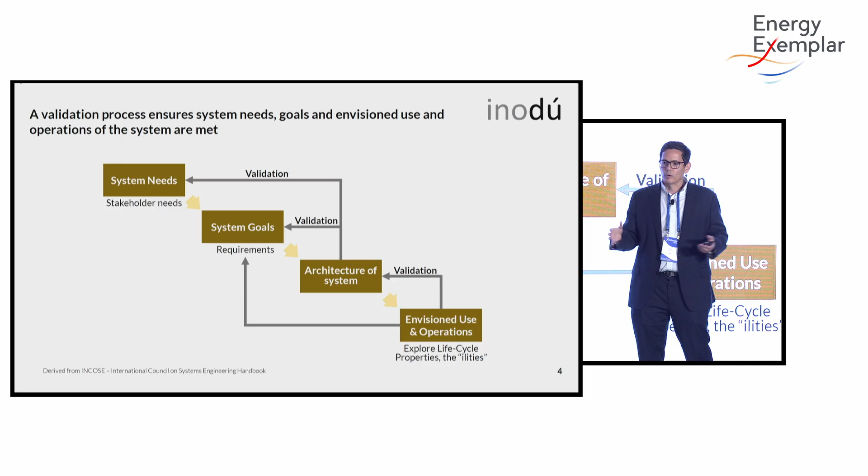Verification is when you go into the model and you check the technical requirements, right? You're checking that the generators have the right parameters, the lines have the right parameters. Validation is really this broader idea of, are we meeting the needs? Are we getting the operational reality right?

And there's a feedback process, right? It's an iterative process where you're checking the operations of the system and you're checking against how it's doing. There's different tools, and you're making sure that you're meeting the system needs and system goals.

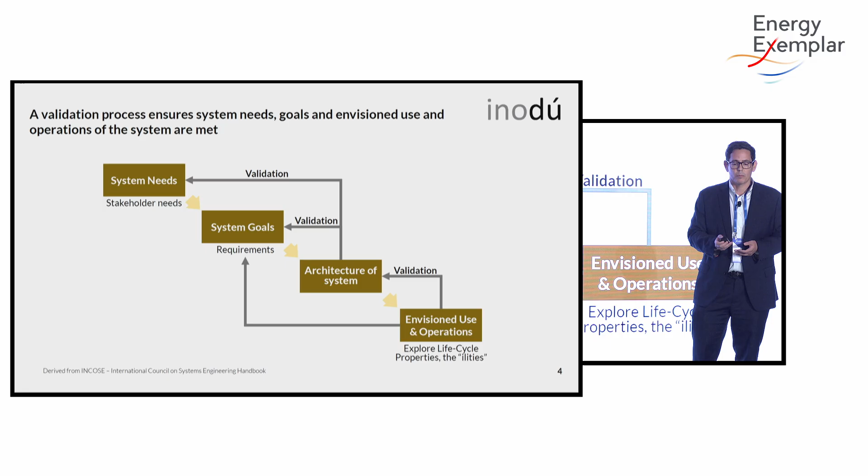Why is it important? Well, I think there's a lot of operational uncertainty and complexity, and that is rising over time. And there's a lot of drivers around creating this operational uncertainty and operational complexity. And we've talked about this today.

We have new large loads, right, like data centers. We have to decarbonize the load. There's retirements of existing assets. We have aging infrastructure. We have impacts of externalities such as weather. We also have the load having a broader participation. So there's a lot of moving parts, which is creating this uncertainty.

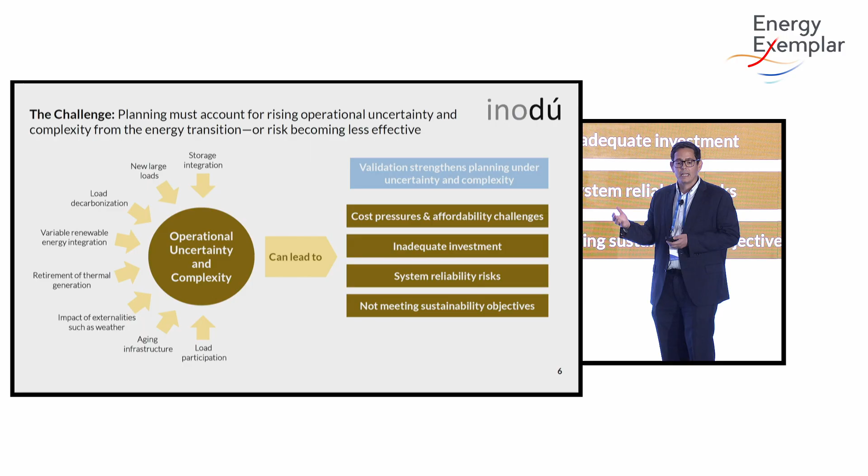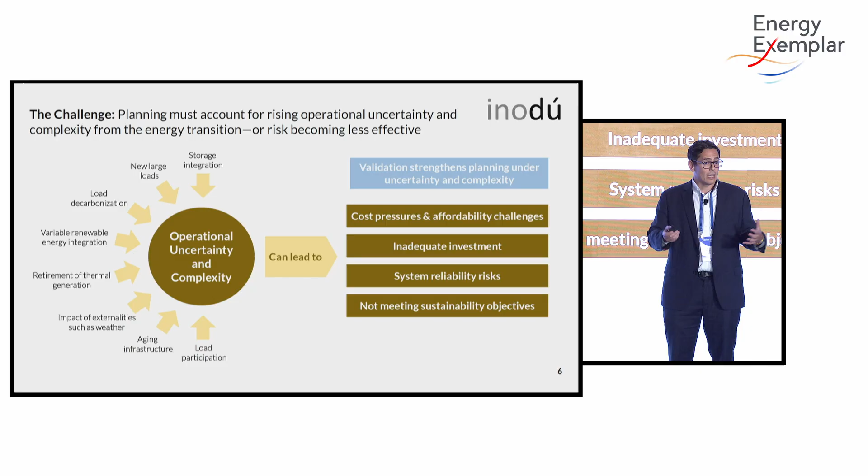And this can lead to challenges, right? It can create cost pressures. It could affect reliability. It could also make us not meet the sustainability objectives. And validation can help us strengthen and understand this operational uncertainty, right, and deal with this, right?

Why is validation important? I asked AI to do this, which is great. I was like, whoa, this is crazy. So I put Charlie Munger. I don't know if you know Charlie Munger, and Albert Einstein. Everybody probably knows Albert Einstein. And there's two quotes that are quite relevant from these two characters.

One from Charlie Munger: when we're thinking about validation, we want to make sure that we're trying to observe operational reality, right? We're real with ourselves. Is the resource adequacy assessment really what we expect operationally? Is the plan, are we really going to be able to meet it in terms of how the system is operating? And recognizing the reality, this is what Charlie said, even when you don't like it, especially when you don't like it, right? That's what we need to be focused on validation.

But then there's another component which, Einstein was more of a visionary. And a lot of times we don't have historical data. We're going to have to look into an uncertain future.

And so we have to envision that operational reality, right? And the important thing, what Einstein used to say, is that the important thing is not to stop questioning. Curiosity has its own reason for existing. One cannot help but be in awe when contemplating the mysteries of eternity, of life, of the marvelous structure of reality. But we kind of have to look for it and look for scenarios so we can envision that reality.

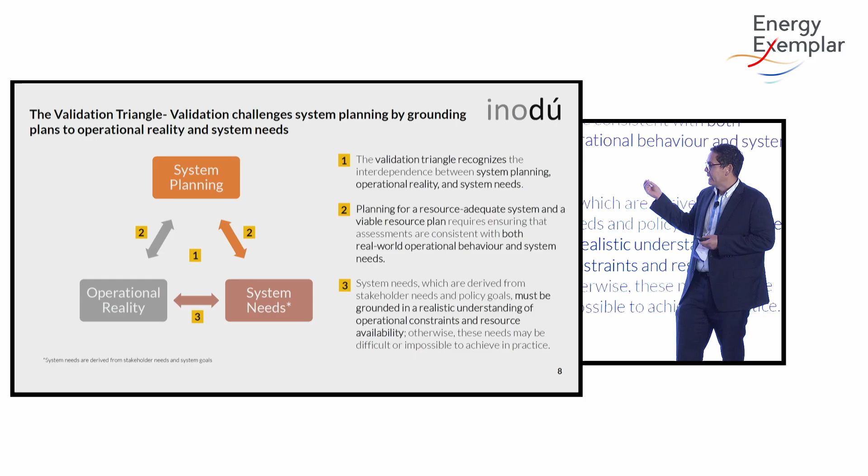And it is important to think about the interfaces, because a lot of the times we're defining these objectives and sustainability goals, but they can't be achieved operationally, right? People aren't really understanding if those goals can be met. So it's important to do validation to make sure the intersection between system needs and operational reality is actually being met. It's also the idea of grounding system planning in operational reality and system needs, and trying to understand the interactions. We'll talk more about that through the case studies.

So whenever we're thinking about validation, there's different components of validation in a process that you can follow. You've got to validate different parts of the process. We're going to go through the case studies and some of these validation parts of the process.

So you've got to validate the assumptions, right? You've got to make sure that, if you have a load forecast, it makes sense. It's an achievable load forecast, or you're capturing the range of uncertainty within that load forecast.

You also have to validate the scenarios that you're developing, because you can choose what scenarios you're going to be running. You've got to validate the methodology and approach—how are you using the tools and the process that you're doing? Is it valid? Can you meet, and do you have a way to get to operational reality and meeting the system needs? You've got to validate the results themselves and make sure the results make operational sense.

You've got to validate against system needs, right? Validate against the stakeholders. I'm not going to go through all of them, but come and see me and we can talk about this in more depth. I'm going to try to highlight some of these through the different case studies.

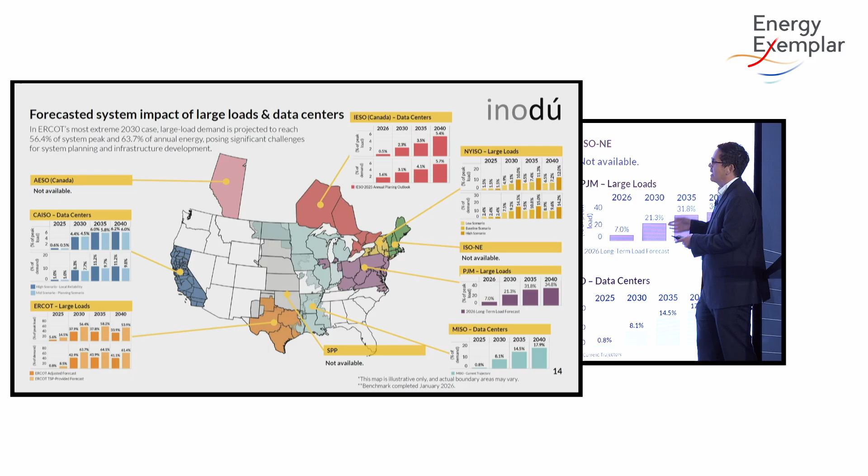So we have regions like ERCOT, when you look at the forecasts and the different scenarios published by different entities, you see they're forecasting that they're almost going to have to build another half state of Texas to account for data center growth by 2030, 2035. The growth rates and impacts are different across regions, but the impact is important.

So whenever we benchmarked these planning or forecasting processes, we tried to extract what are the important components of a forecasting process that would make sense for this data center growth. We came up with these elements of a robust forecasting process, which includes validation.

Whenever you're trying to forecast data center growth, essentially load growth, the first thing you have to do—and people are doing this in different ways—is track the state, the attributes, and construction data around the development pipeline. So you're gathering data, but it's important not to track just traditional parameters like demand, but also whether the data center is bringing its own generation, and whether the demand is flexible, because that helps you make different types of assessments.

Also track different maturity indicators—what in the different regions determines how mature a project is down the pipeline. So you come up with a template to track the data, and people and planning regions are doing it different ways.

Then you have to generate scenarios. There's so much uncertainty, you have to generate multiple scenarios. Whenever you have a good process for forecasting, you have to clearly define the assumptions, define the limitations, and make sure you're capturing the uncertainty envelope around the forecast of data center demand.

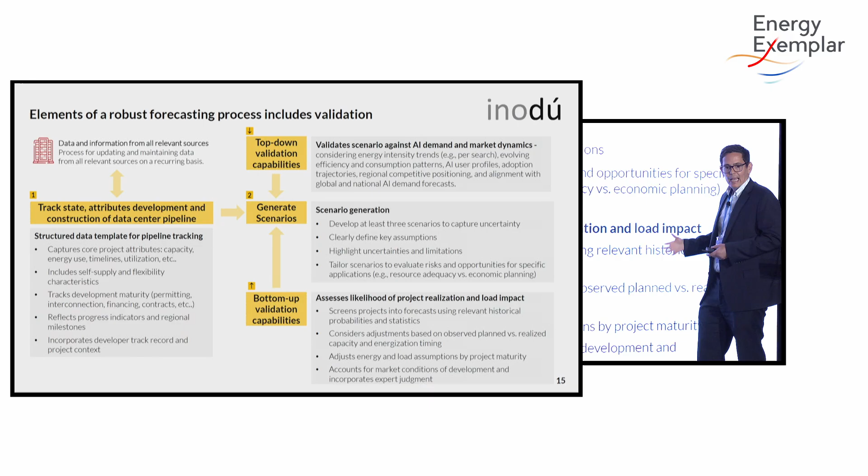And then there's two things you have to do in terms of validation: a bottoms-up validation and a top-down validation. The bottoms-up validation is, I start gathering...

probabilistic assessment or statistics around how projects are being developed, and whether a particular project in a particular state, with certain maturity indicators, could help determine if the project's going to make it to completion. So you gather that information to make this bottoms-up assessment and prune the development pipeline. That's one thing you have to gather.

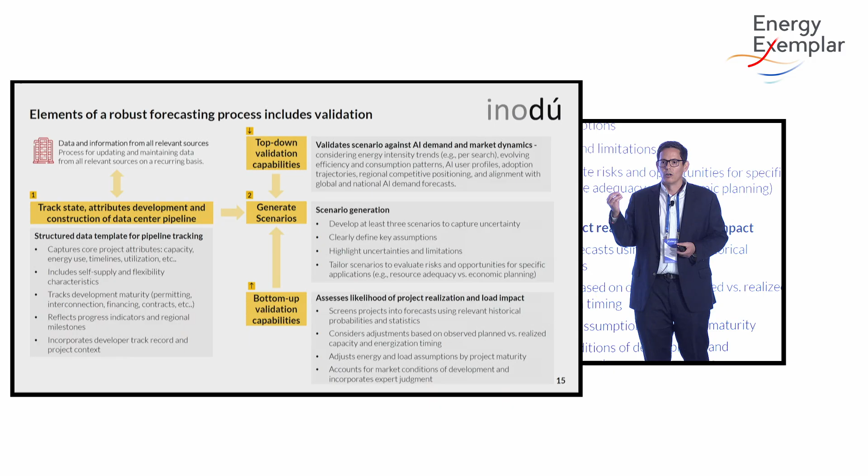But you also have to do some top-down validation. That top-down validation means, how much is the market willing to bear? What is going to be the real demand from AI? Here, we're not trying to get one scenario right, but we're trying to get the uncertainty envelope.

So as an example of top-down validation to define this uncertainty envelope, Google in 2025 released data around how much electricity a median AI prompt would consume. They also said that in the previous 12 months, the energy consumption per prompt went down 33-fold. So when thinking about top-down validation—how much the AI demand will really be—we need to start tracking these types of parameters.

AI use is highly uncertain, but we have to think about these things to make sure our assessments are real. We're also capturing not only the high demand scenarios—planning against those, which often come from the construction project development pipeline, lining up all the projects in the region to come up with a very high demand forecast for data centers.

But it's also important to consider a low demand scenario, because if we don't plan for the low demand scenario, that could lead to overinvestment, which could lead to increasing costs for consumers, since we'd be building much more capacity than we need.

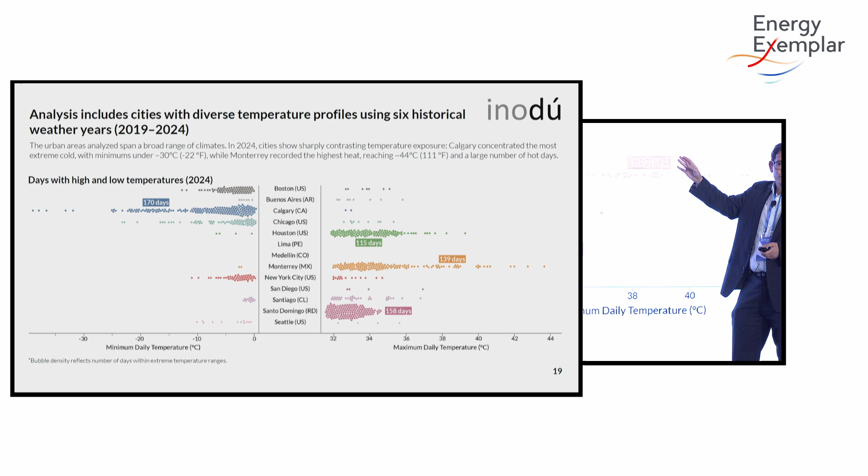I'm not going to share all the details on this assessment, but what I'm trying to show you is that we captured cities with very different climates—cities that are much colder, cities that are much warmer. Here are some of the days with high and low temperatures in 2024, so you see the diversity of the cities captured in this benchmark.

The metric we calculated for these cities is how much the daily load would increase—that's the slope of the line—for a 10-degree temperature change. For example, with cooling in Buenos Aires, a 10-degree change during 2024, if the temperature was 10 degrees hotter, it would lead to 53% more consumption in daily demand.

So remember this slope. We compare it across the different cities, across all the different years. This helps us do validation, because what we're trying to do is make sure that the forecast models we're getting for the load actually make sense, and that we're putting the right inputs into the model.

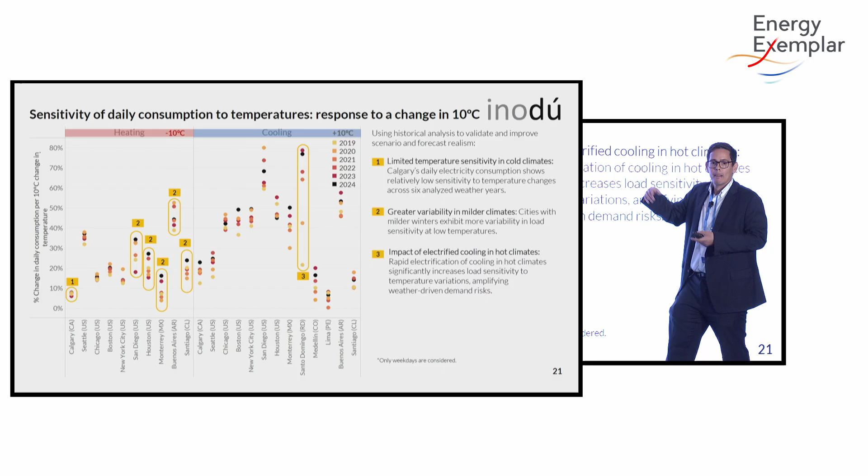Then we see a city like Santo Domingo, which is rapidly electrifying over the summer, going from a 20% change with a 10-degree temperature change to 80%. This is what happens when you have rapid electrification and changing demand use. So it's very important to use historical validation to make sure the inputs and assumptions you're putting into the model are right—this is how you could do validation using historical data.

We're going to show 2 case studies rapidly around resource adequacy outcomes.

So we're going to see how resource adequacy assessments work and how to look at the results of resource adequacy assessments, both in CAISO and in Chile.

What we did in CAISO is we looked at the summer loads assessment that CAISO publishes every year. We went back and backtested all the different years of the summer loads assessment, where they basically do a resource adequacy assessment and say, hey, in the summer we're going to have these resource adequacy issues for the next year. We did this for 2022, 2023, 2024, and 2025.

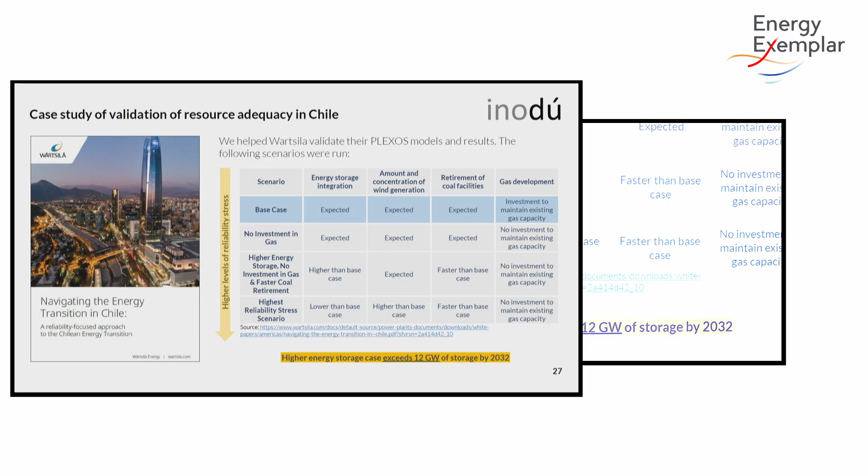In Chile, we did a case study and published this paper with Wärtsilä. This is not backcasting, but we ran scenarios going into the future with different levels of reliability stress. We had a base case and a higher stress scenario where we didn't have any investment in gas - so gas retirement, faster retirement of coal. We also had different levels of energy storage integration.

When we did this assessment going into the future, this is a day in 2032, a day of peak demand. Based on the capacity accreditation as currently defined for resource adequacy in Chile, using the methodology currently defined, it shows there would be 35 gigawatts of capacity in 2032. The black line is the maximum demand we saw for 2032 in our model.

But if we actually adjusted that capacity considering new operational constraints - like removing solar from the night, because they accredit solar at night as well - if we consider wind scarcity scenarios during the night, and scarcity hydro and thermal scenarios, we get to a much lower capacity than the actual reserve margin suggests.

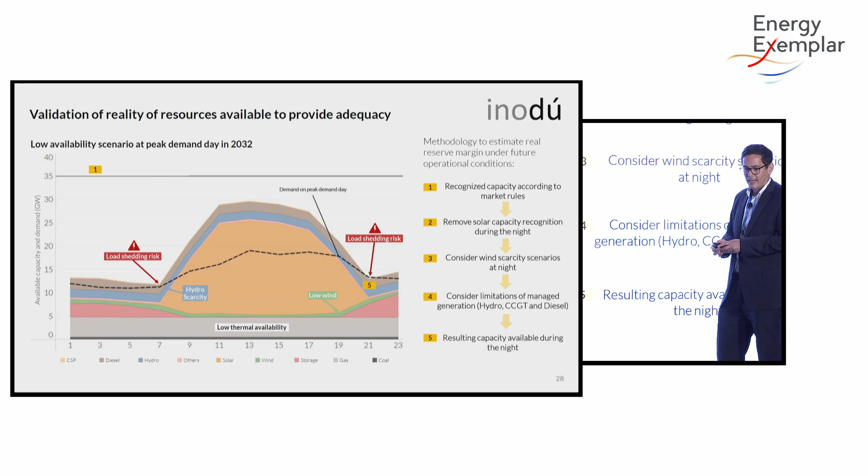We did this across the different scenarios I showed you, and by introducing these operational constraints - which you could use PLEXOS to do - we start seeing that the reserve margin is not as big as you'd think through the capacity accreditation mechanism. We get to very low reserve margins in certain scenarios, especially with gas retirements and high levels of energy storage integration.

Then finally, the final case study is around the validation of the contribution of energy storage and its operations. We also did a benchmark across all these wholesale electricity markets to look at how batteries behave in terms of energy arbitrage.

But Chile is interesting because it has 2.2 gigawatts, but the demand is about 10 gigawatts in Chile, so that means it's gotten to 20% of the maximum demand, which is pretty close. If we do that same calculation for ERCOT and CAISO, they have much higher demand, but it's still pretty high, also around 20 to 30%. So also very high integration as well.

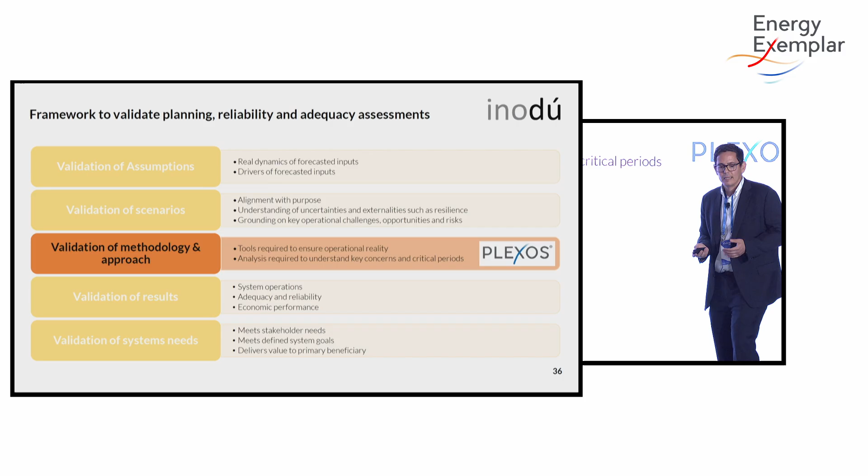So to bring it all together, how do we use PLEXOS for validation, essentially? We showed this process, and PLEXOS is really important, and we use it a lot in the methodology and approach. PLEXOS can be one of those elements you use to validate the methodology and approach.

Whenever you're using PLEXOS, we could use it for system planning, for system operation forecasts, resource adequacy assessments, resource planning and transmission planning.

But what we can also do is look at the assessment and say, how do we run additional scenarios to test that operational reality? More detailed production cost models to say, we see these outputs from these system plans and this reliability, how can we model in more detail the operational reality?

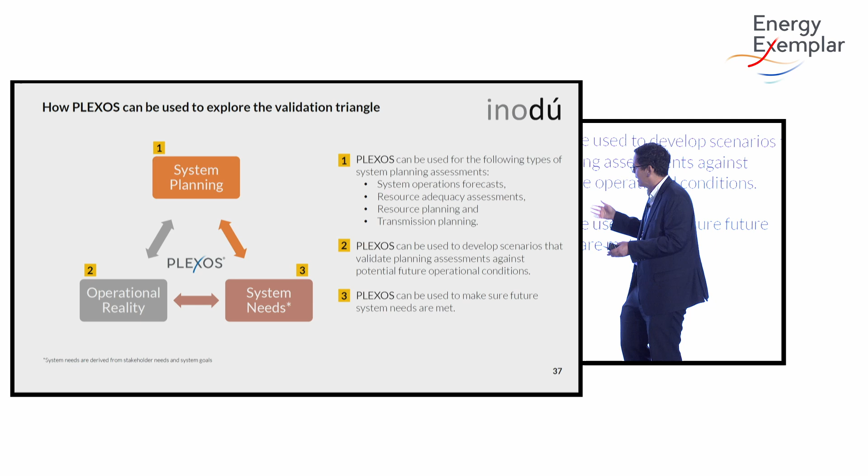We can also use PLEXOS to assess whether we're meeting the system needs or not, right? Are we meeting the targets that we need to do that? So we can use PLEXOS in that way.

We also have to validate the observed operational reality, so use historical data and do historical analysis. Like I showed you, we could do backcasting to see if we're actually meeting the new trends that are going to be big into the future. We can also use expert judgment.

We can use PLEXOS to envision the operational reality by doing production cost modeling, trying to emulate the real-time operations, and see if our assessments are actually meeting operational reality in the future. We can do integrated operational assessments of stressful periods as well.